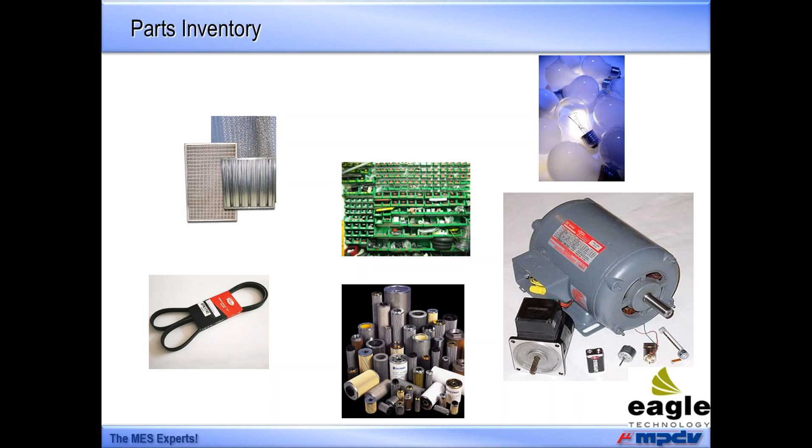Proteus MMX is a world-class CMMS solution. It's cloud-based. It's been written from the ground up in 2010. We're on our 3.3 release, and we've got thousands of users using this product independently throughout the world just for maintenance management. But today, the exciting part about our presentation is that we're bringing together MES and CMMS from two world-class producers, offering you total integration.

We have to talk about technology because technology changes constantly. If you have products that were written years ago, they will eventually fall apart. Eagle has developed and continues to develop in current technologies the database structure and the code for our solutions, and this technology today allows easy interface between systems.

In the past, proprietary systems were written and the interface between system A and system B was very difficult. Today, with the technology that we have, we are offering you an interactive, interfaceable solution to tie together to your MES from MPDV as well as potentially other systems. Eagle has been interfacing with building automation systems, for example, in real time for over 15 years.

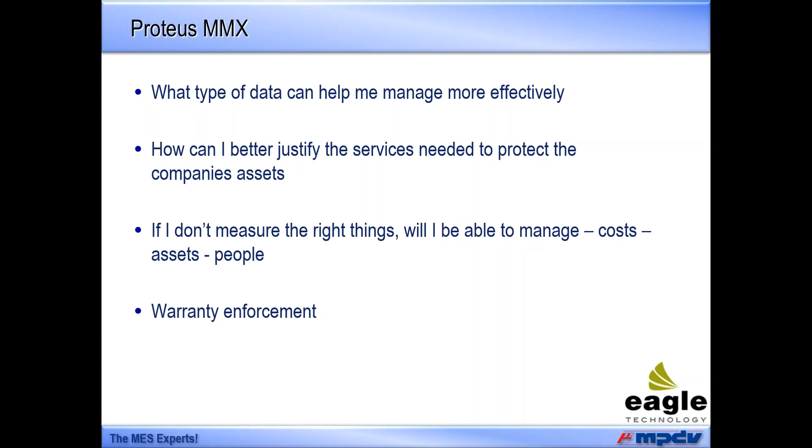The system's customizable and robust, and yet our users tell us it's logical and easy to use. And that's critical in today's environment. We offer reports, multiple languages and currencies, and you can add attachments to your work orders, including videos, manuals, parts catalogs, things like that, to the work order level, showing the technician specifically what needs to be done, giving them a tool using a mobile device that makes their time and the measurement of their time very effective.

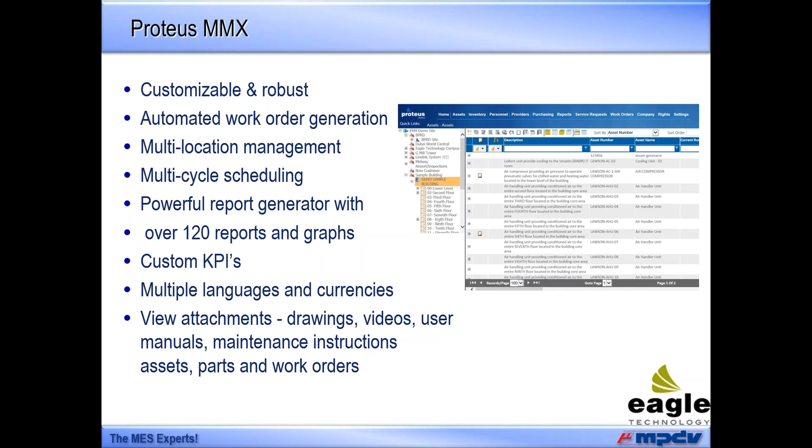I'm going to turn it over now to Kurt. Yeah, so thank you very much, Harry.

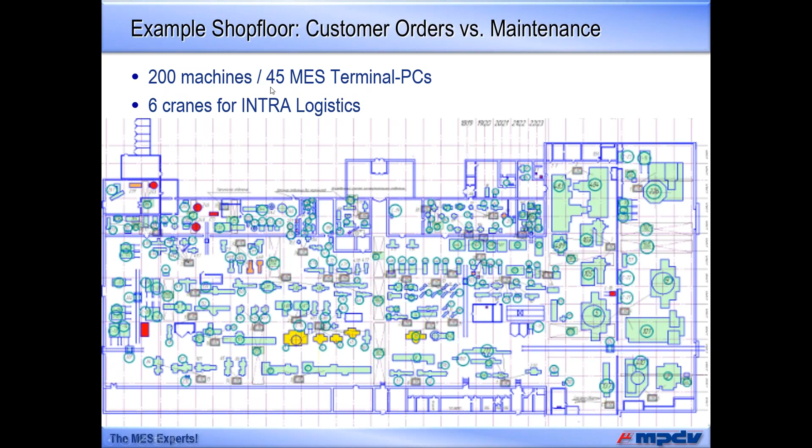So this is a very typical setting where we have about 200 machines, and you're seeing some panel PCs that we are fixing on the shop floor. Here we have 45 panel PCs, and I just go ahead, where a worker is registering a barcode with a production order, logging on, logging off operations.

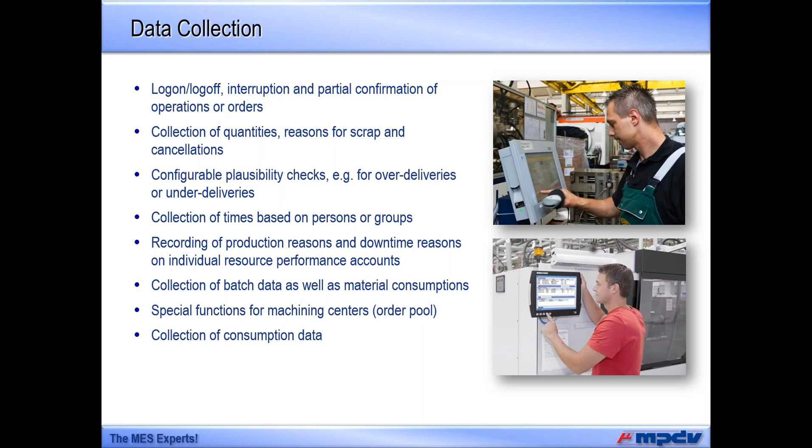Our software also is then collecting quantities. We have automatic quantity counting features. We capture scrap reasons and also do the collection of consumption data. So the idea is really to have an online and a transparent view of what is going on in your factory. An additional important element is really our machine data module.

So if you have newer Ethernet capable production machines, we have software interfaces where we are getting status and counting information. If you have older equipment, we have such a magic box, I call it, where we can gather energy as well as counter and status information. So the idea, what we're doing here in this large factory on every single workplace or machine, it's very simple. We take production orders, shoot a barcode, log on the order.

While this is a manual operation, then the machine data function comes into gear, and once the production starts on the basis of the counter, we capture the automatic switch from setup to uptime, which is production. In case a standstill occurs, which is a very important information for the maintenance, we can also automatically record the time events, when exactly a standstill occurs, and we can also assign standstill reasons, which then can trigger a maintenance workflow.

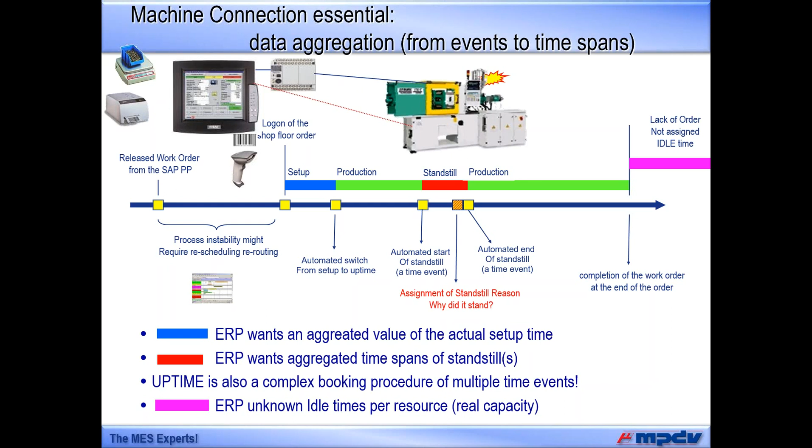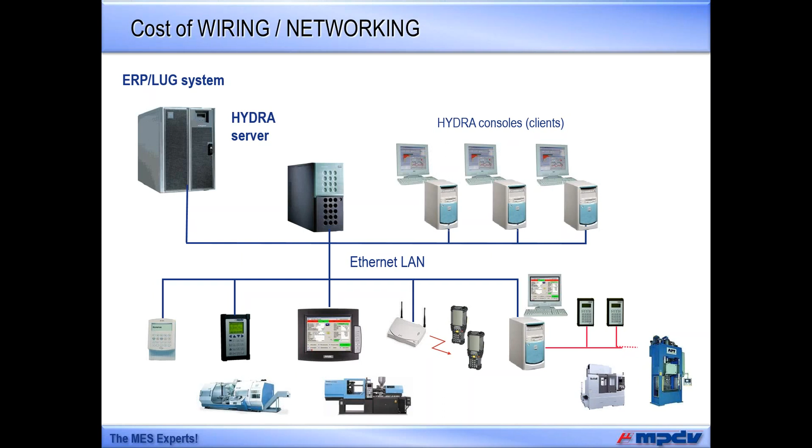So the consequence is that you're having an efficient, completely wired factory. You're seeing here some examples: bigger touch screen, mobile terminals, Wi-Fi, some coming and going, time and attendance terminals, and the classic PC workstations from where you can access any information in your plant in real time online. Good.

So while the capturing is a very, very important part, once you have mastered this, the basic question arises: how do we organize, how do we sequence, and how do we optimize our production process in the timeline? So here we have our additional module, shop floor scheduling. So we take your production orders, we define either a 2-shift or a 3-shift or a 1-shift regime, and we schedule your different production process in a connected and in a very systematic manner, where we can eliminate capacity peaks, where we can provide the personnel as a scheduling result, and we can do some optimization.

There are certain strategies for optimization, like setup change or main OEE efficiency. So this is really a flexible tool that allows you to completely control your shifts, your delivery dates, and your internal production milestones.

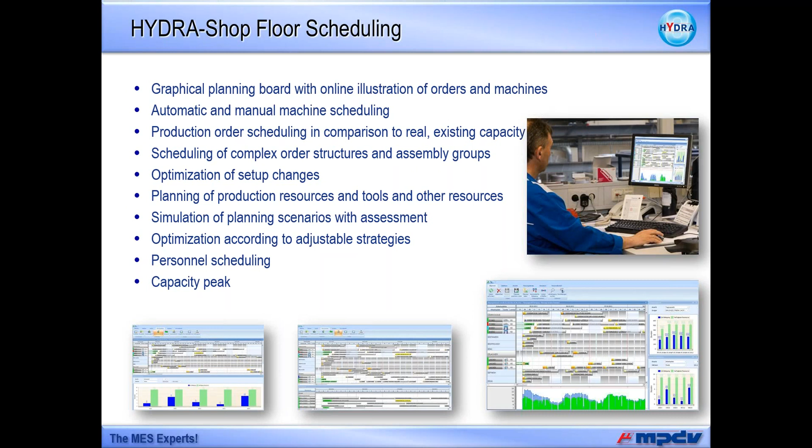Sorry again, I was a little bit too fast.

So the biggest challenge in complex multi-step factories is if you have 3, 4, 5, 6 departments. For example, you have a final assembly and a quality testing, then you have a pre-assembly, and then you have certain feeding departments. This is a very typical example where we have 2 feeding departments that are making their products for the assembly of customer orders.

So once you have this requirement in your plant, our complex order networks in our scheduling module really can make a difference for the complex and multi-hierarchical scheduling features and requirements in your production.

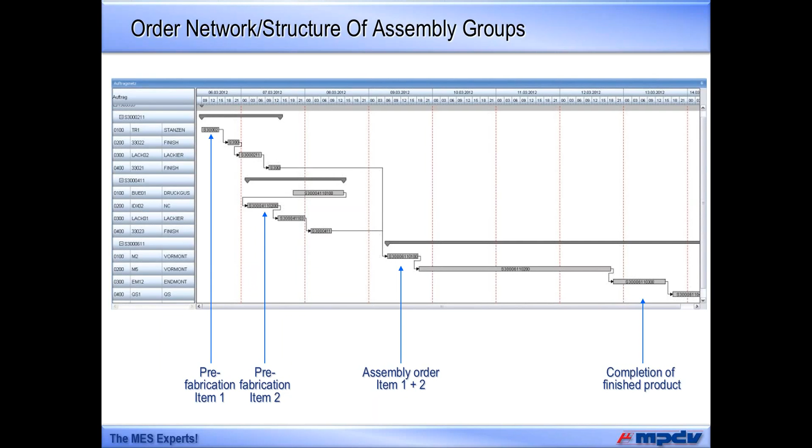Yeah, the basic benefit is that everybody has permanent and online information. So the maintenance department can look, where are my standstills? The sales department can look, what's the expected delivery date of my customer's production order? The general management can perform reports and evaluations.

The production planning is the main beneficiary for really doing the overall plant planning, but also many times foremen, shift heads, or department heads are using the online data out of our production database.

So the beauty is that you capture each resource in your plant, and then all the departments have a common source, a common online source to produce more efficiently, to eliminate waste, and to know what's really going on.

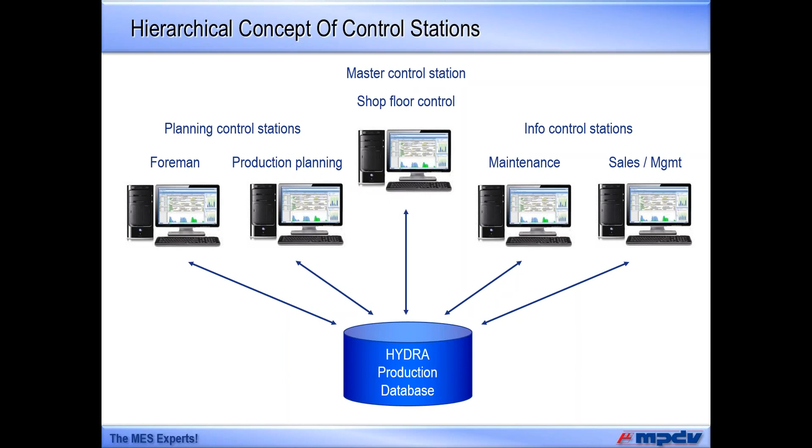So if we look today at modern manufacturing, we still see a very high percentage of handwriting, of Excel sheets, of handwritten labels, and the goal with our Hydra MES system integrated to Eagle's CMMS is to really optimize that process and to really have a complete real-time online image of your factory. Good.

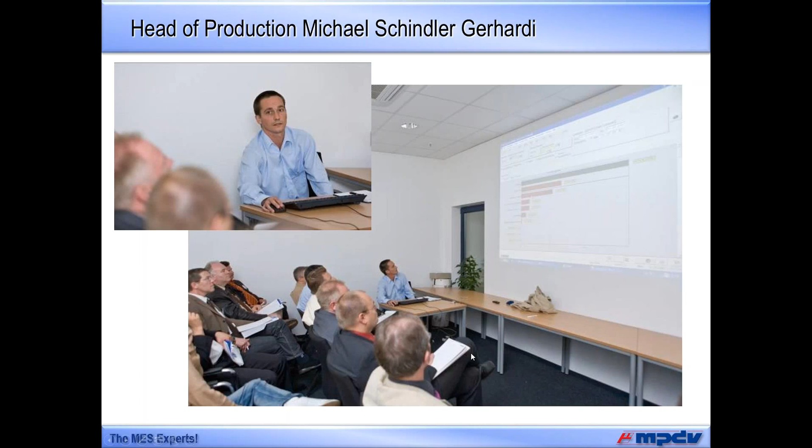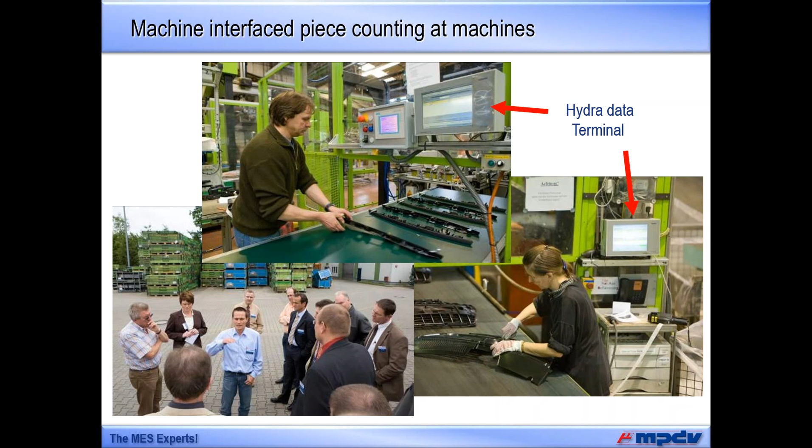Yeah, and then another goodie, here you see a live view. So these are our Hydra terminals directly on the machine. This is such a front grill that comes out from the press. You have some printers, barcodes. Every scrap piece or every deviation is recorded immediately, and they have an online performance and an online tracking system and a quality inspection system installed here.

And the last thing, a very fancy thing, is the process and energy and temperature capturing. They have some modern and newer machines where we can also read process values out of the software, and so everybody wants to see that too. Good.

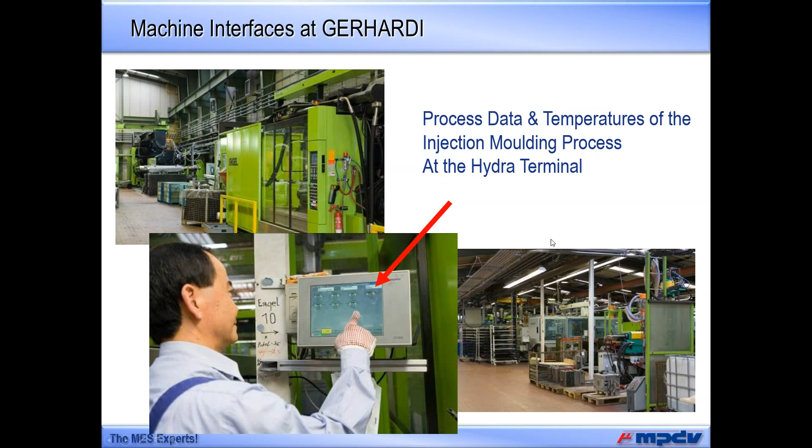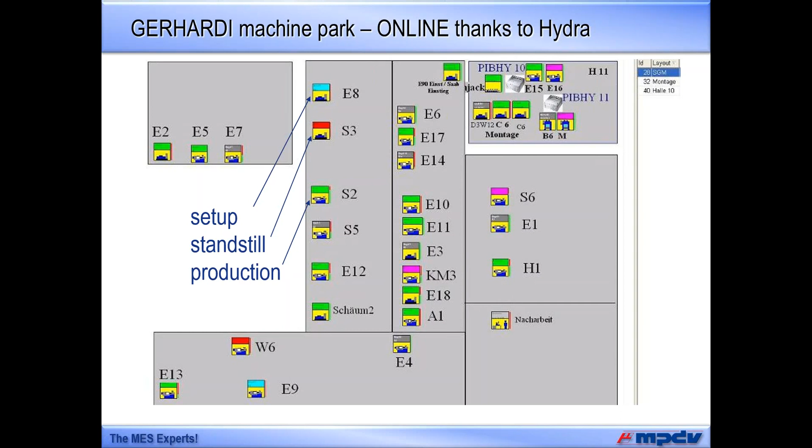This is the major instrument at the Gerhardi factory. It's the so-called graphic machine park. It is really one screen that lists all 60 workplaces and indicates through a color system what is setup, what is standstill, and what is production. So they use this screen very well, and they also beam this screen up to the forklifts through a Wi-Fi.

So they have found really a smart way of intra-logistics, because each of the forklifts has this previously seen screen, and with his finger he can tip on every machine and he exactly sees how many pieces are already produced. And this guy, out of his experience, he knows the bucket sizes, and so by this he has a complete way. He knows what to pick up where, at which press, when.

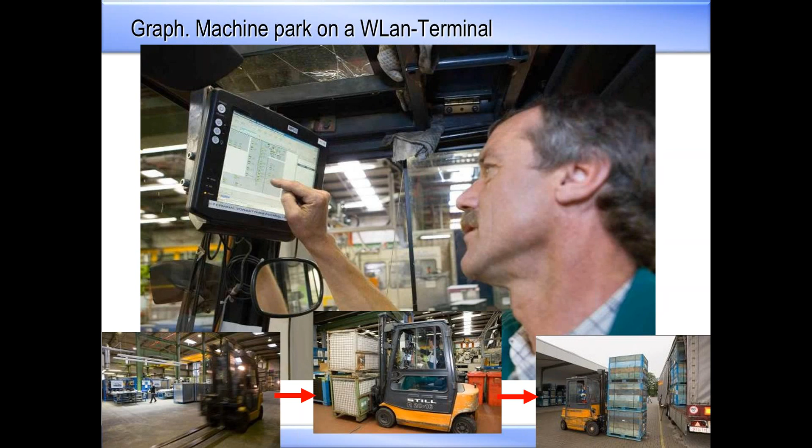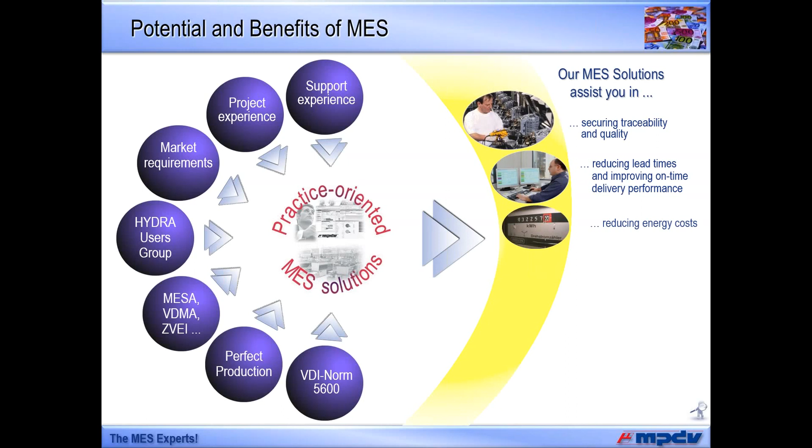Yeah, so this was a first glance. My idea was to make you appetite on complete software integrated manufacturing processes and on manufacturing execution. I have here a short summary. Our company is 30 years in the business. We have about 1,000 installations, and here we just have summarized all the aspects that

we can do for you, which is securing traceability and quality, reducing lead times or doing a better planning, improving your on-time delivery performance. The other thing, as mentioned before, and also a feature of CMMS, reducing energy costs. But the main point is really to increase the use of your capacities, to really get the maximum out of your machines and workplaces. Also to minimize the material and the work in process, and to let your workers work more efficiently, more relaxed, more systematic.

And of course, as you can imagine, if you connect all these machines, you have enormous amounts of KPIs. You can exactly track and trace night shifts, weekend shifts. There is an infinite number of reporting features in our system.